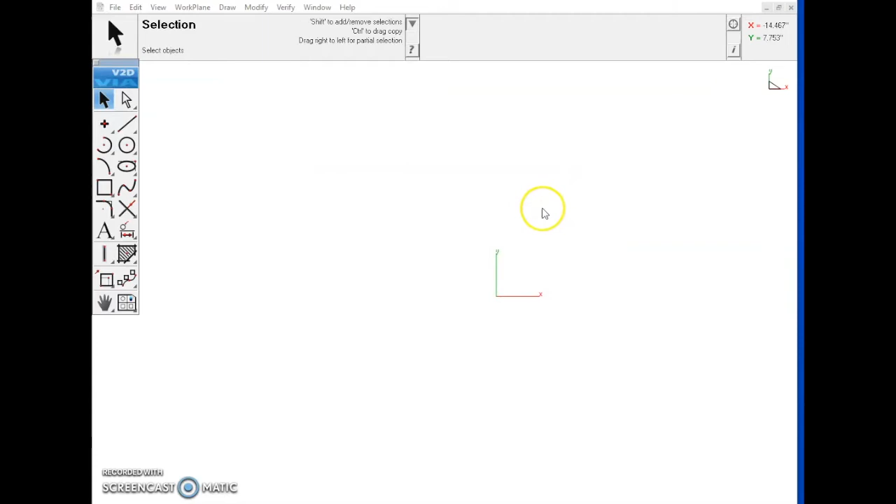After it's open, we're going to want to go to File, Import. For this, we're going to be importing a DXF file. Our units is going to be in inches, but if your file is metric, you may import it as millimeters. We're going to hit OK. Our file's on our desktop, and it's going to be called Bottle Opener. This is just a simple bottle opener to demonstrate how to edit something like this.

Now here's our part. It's pretty simple. Let's say this part is grouped together, so when you click one time, everything turns red. First we're going to want to ungroup the part. Now this is already ungrouped, so it's already been selected.

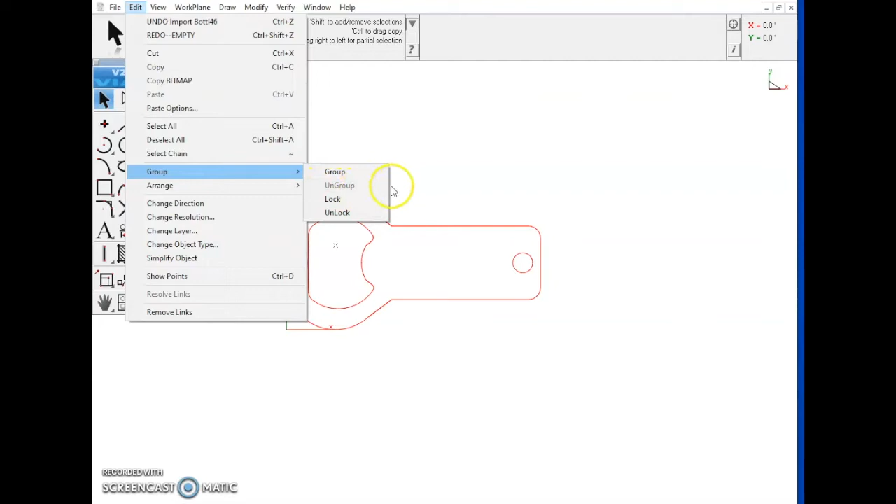So after you ungroup the part, there's a couple different things you could do. You can either click from the top right down to the bottom left, and you're going to be doing this with your selection tool. Now you have these points highlighted, so everything that's red will move together. The reason why there's a little red square here that's darker and bigger is because this is our connecting point. This doesn't have that because it's stationary by itself.

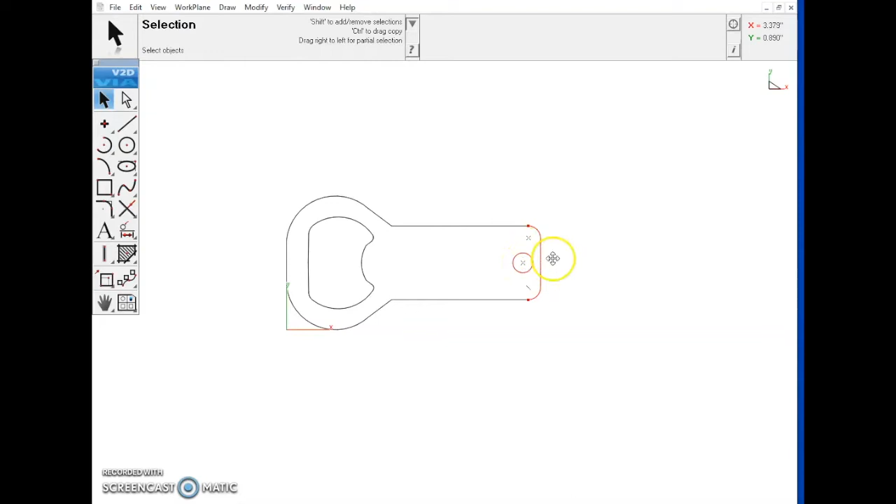So if we drag out, we can literally manipulate this to whatever we want. So say we want to put a little bit of an angle on it, we want to drag it out, we could do that also. So for this, we're just going to drag it out, click and drag.

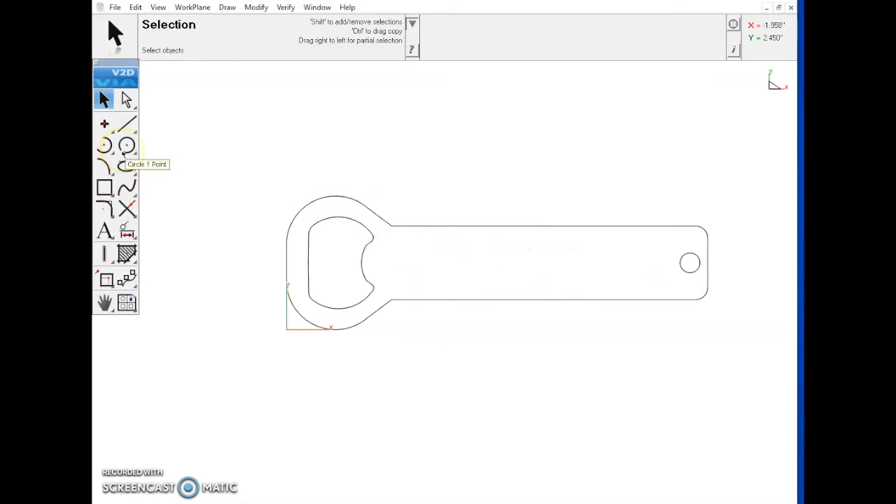After that, let's say we want to put a couple holes down through here. We'll go over here to our circle 1 point. We're going to go ahead and make some half-inch holes, so the diameter is going to be 1/2 inch.

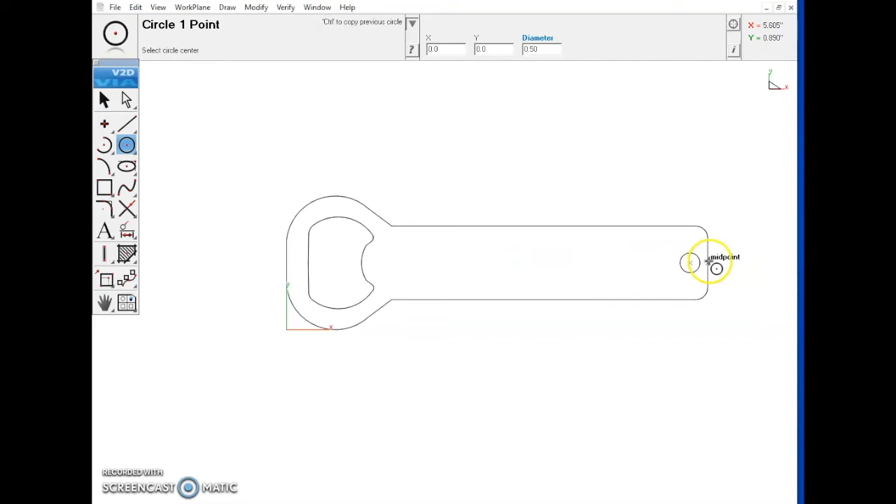Now to try and get this right in the center, it'll be kind of hard. So basically, ViaCAD is going to allow you to find your center or midpoint, that's going to be in the middle of your drawing, and it will literally draw out your crosshair. So for this, we're just going to basically put a couple randomly spaced holes. And now our part's going to have holes in it.

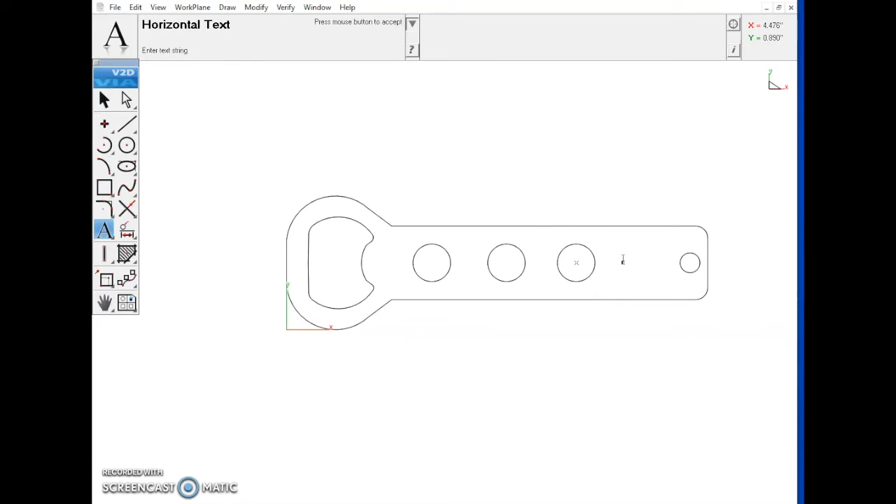Now let's say we want to put an initial on the part also. We can come over here to our text tool, click once. We're going to say, let's put an H, a capital H. Go over here to the top left, click back on our selection tool. Here's our H, we're going to place it where we want it.

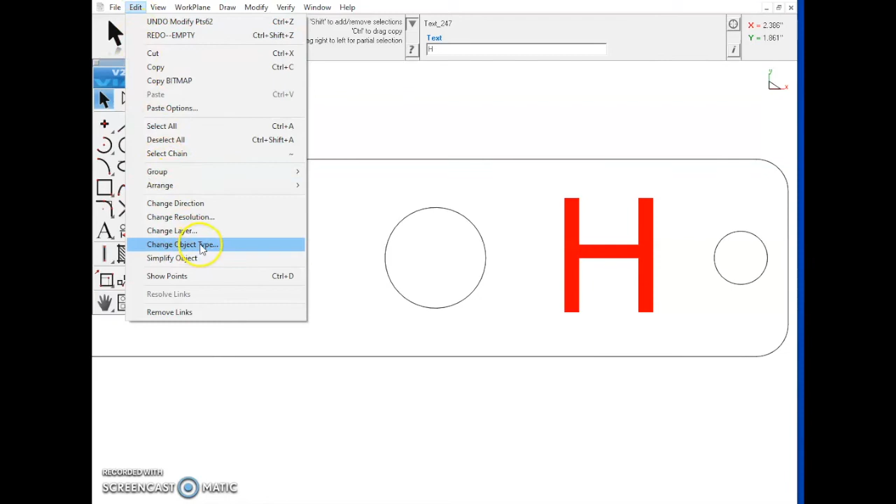Now to make this cut out, we're going to have to change it into a line type. I'm going to click Edit, Change Object Type, and change it to Lines. Once you've done that, you'll see a duplicate of it. We're going to want to simply click on the text and delete that, or hit backspace. Now we'll have an H inside of our part.

Let's say you want to just modify some things up here. Maybe you want to make this bigger or longer. You can also go like that, or back and forth.

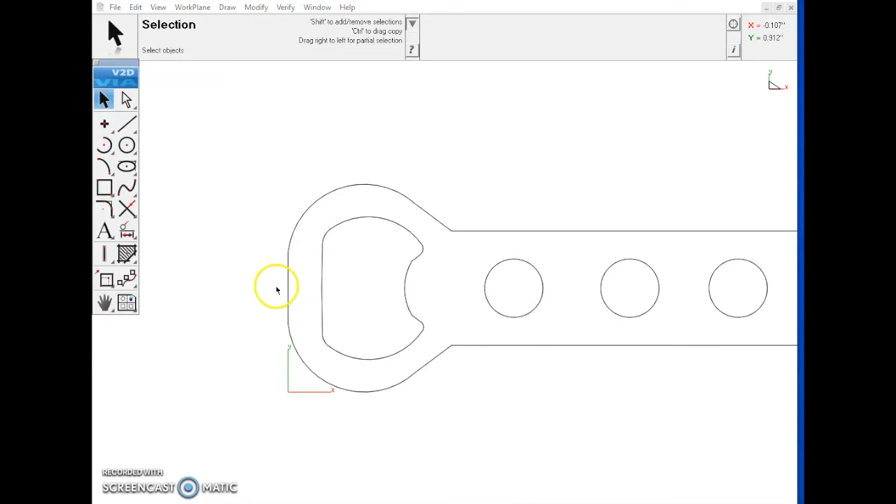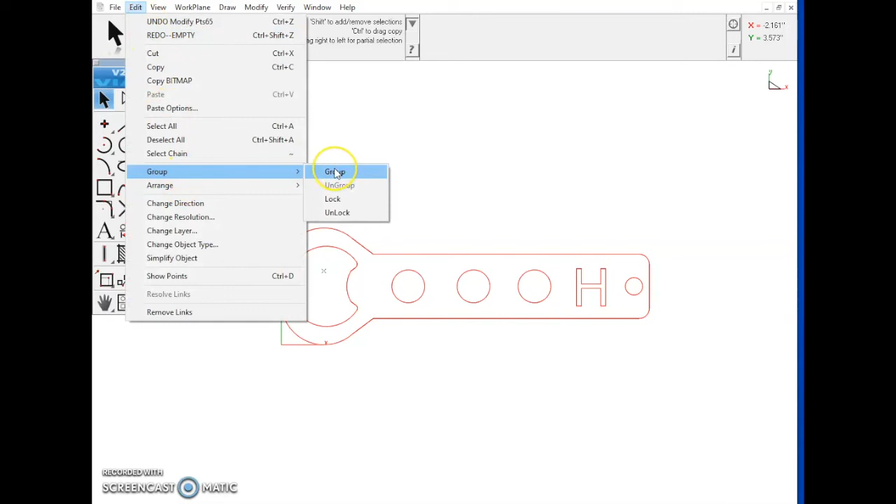Now basically, we're going to want to take and group this together to make this one final part. So we're going to click from the bottom right up to the top left to highlight the whole part. Next, we're going to go to Edit, Group, and we're going to group this together. What that basically did was combine this all into one part. Now if you want to break it apart again, you can highlight it and go Edit, Ungroup.

But for this, we're going to now save it. We're going to want to go to File, Export.

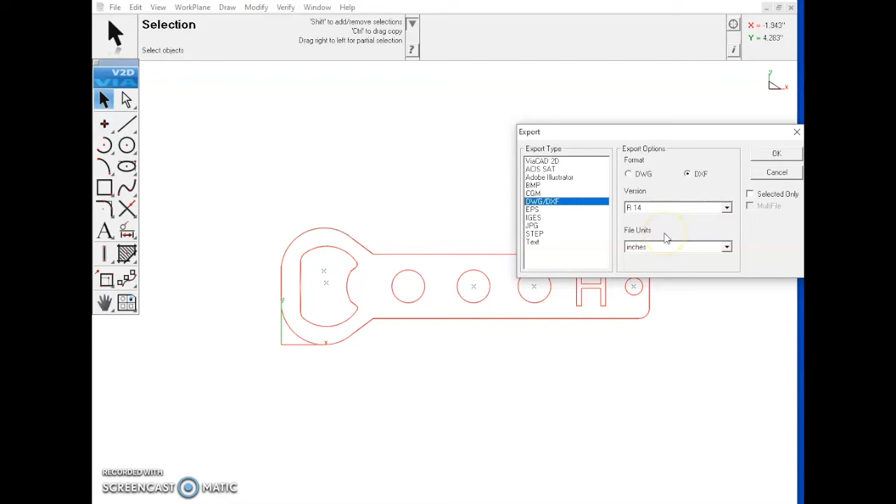We're going to want to make sure it's DXF, version R14. Our units that we're exporting in are going to be in inches. We'll hit OK. We're going to name this bottle opener H, and we're saving it to our desktop.

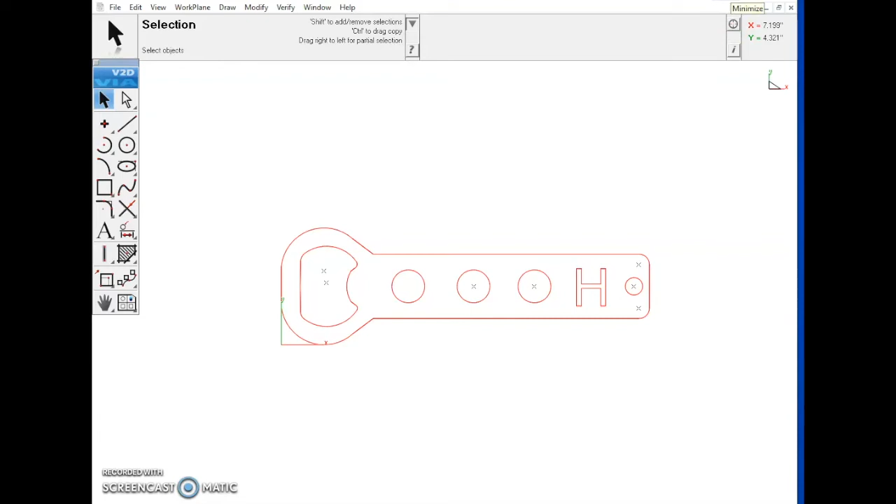Now that's finished, it's going to be time to open up SheetCam to create our cut paths and generate our code. Here's SheetCam right here. We're going to want to open that up. Once it's open, we're going to go to the top left and click File, New Part.

Do an import of drawing? Yes. There's our bottle opener H on our desktop. We want to make sure we have the DXF files selected also. We're going to open that up.

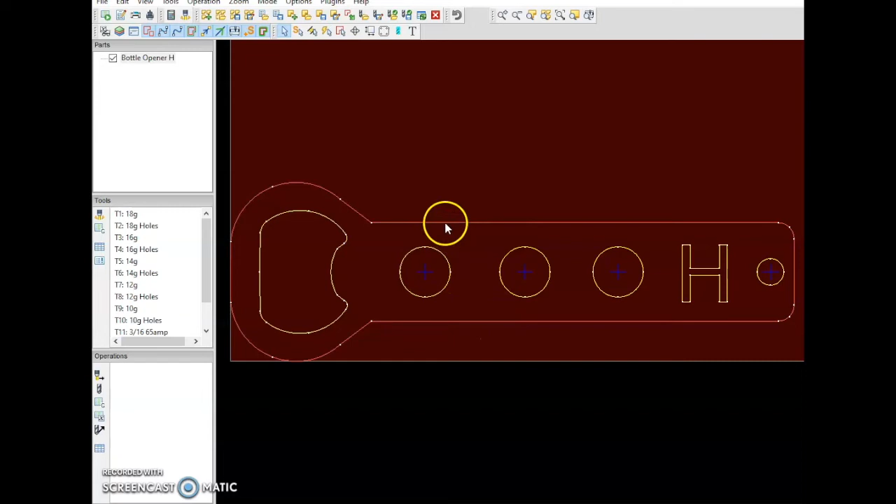Our scaling is going to be in inches. Our drawing position is going to be in the bottom left, which means that when it does cut, it's going to start from the bottom left and work its way out. So here's our part. Just like a stoplight, yellow is going to cut before the red. This looks good here. All this yellow is going to get cut, and then the last cut will be the red on the outside.

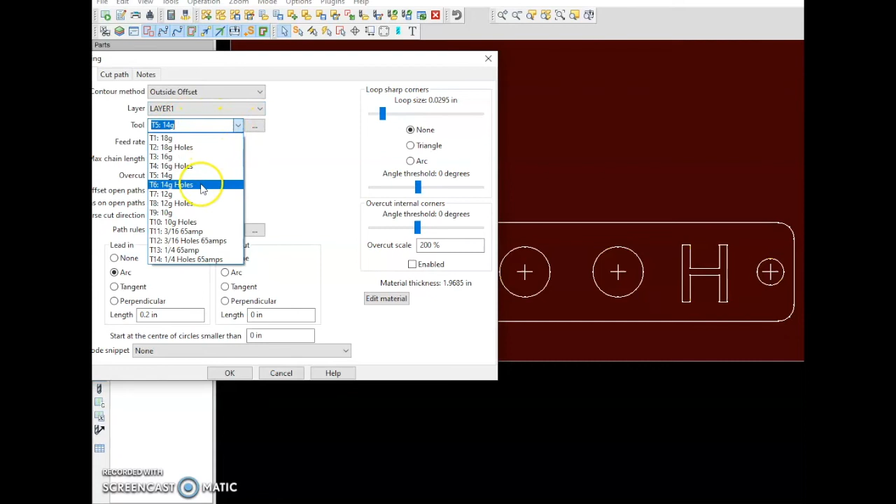We're going to want to go to our operations. We're going to select the outside offset, layer 1. Our tool for this is we're going to use some 12 gauge. Feed rate, we'll just leave it at 120.

We're going to do a lead-in of an arc at 0.2. We could change this to 0.1 if we want, so for this we'll just change it to 0.1. We're going to hit OK. So now we can see that on each cut, it's going to start inside of the part, so then we have a nice finished cut product.

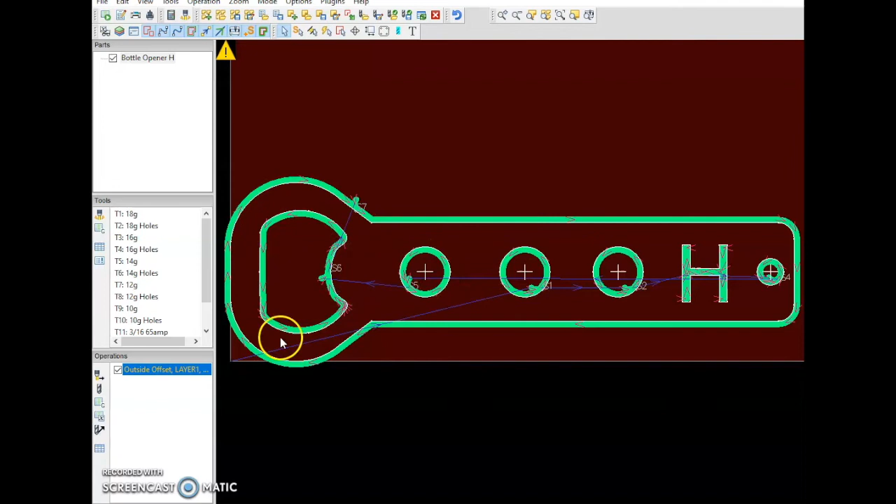Next, what we're going to want to do is go to the top left. We're going to click Run the Post Processor. We're going to save this to our desktop as G-code, and we're going to leave it the same name, Bottle Opener H. After we hit save, we can go ahead and open up Mach3 and get it ready to cut.

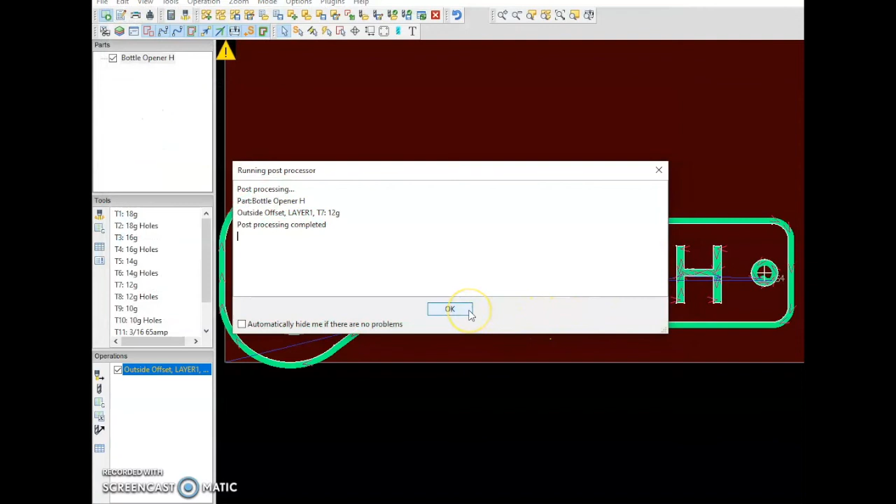Minimize this, open up Mach3, select our profile. Here's our Mach3 screen, our operations center right here. I'm going to click Emergency Reset. We're going to move the table to the starting position. I'm moving this one to the bottom left of the sheet.

We're going to lower our Z down to just about a quarter inch above the material. It's good to start off with. Next, we're going to click 0 All.

Then we're going to want to load our G-code: Bottle Opener H dot tap, which is going to be our G-code. You'll see your part appear right here. Now you can zoom in and zoom out, and then you can use a right click on the mouse to move it around. You can use that to view your part.

Next, it's pretty much ready to go. Since we have it zeroed out where we need to start, we can go ahead and proceed and hit cycle start. The torch will move over to starting position and touch off, and then start cutting.